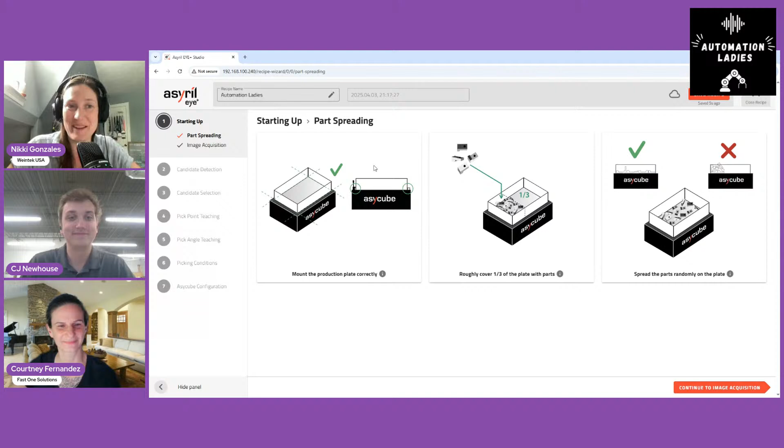Okay. And I will note, for vision folks watching, this ought to all look pretty familiar. But if you're a control freak like I am, and you're starting to wonder where do I set my gain and all these other things that you want to be a control freak about, I pestered him when he did this demo, and he had to divert and show me where all the stuff is. But you can actually wrangle control as much as you want. As simple as they've made this, if you want to peel back layers and get into settings that he's not showing here, it's all there if you're the control freak like me. I just wanted to make that a side note.

Yeah, I'll go briefly over stuff, and I'll probably not go as in depth as some people might like, but we've got a lot of different options as well, and tools to be able to make it as advanced as you need, or as basic as you might want. So the world's your oyster here.

But even this first step is just image acquisition. So when we're setting up our recipe, we want to build up a database of images to use for vision training. And so by default, EYE+ will take 30 images with the backlight. And if you've got a front light, it'll take 30 images with the front light as well. Those are the pictures that you get to use to train your vision model on.

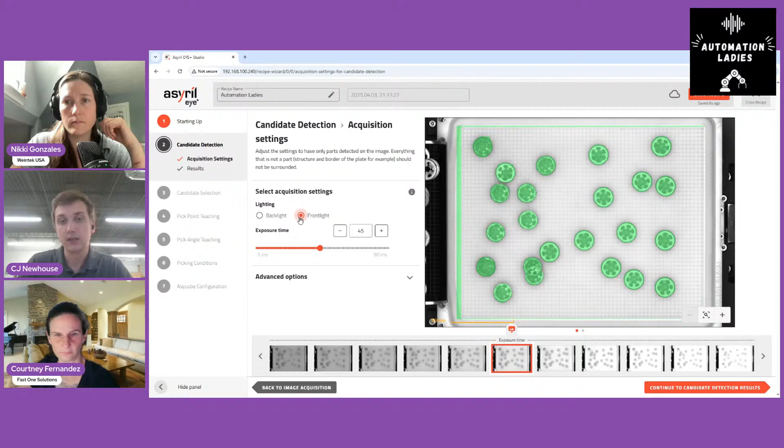So during production, it's not going to take 60 images. It's only going to take whatever images you actually use in the recipe. But we're given 60 to work with to use at different steps. So right here, you can see how my exposure time varies from 1 millisecond all the way up to 90 at a 3 millisecond interval. And so at any next step, I can use these different lighting settings. I've got backlight and front light as well. So a lot of tools for you to be able to use.

But what this first step really is, step 2, which is really step 1, is to just determine what is a part and what is background. And so EYE+ has this really cool algorithm that we use to determine what is a part and what is plate automatically. It goes through all of the pixels and uses that algorithm to determine, okay, these pixels are really white and these ones are a lot darker, and so this must be a part. The goal of this step is to get all of the parts marked in green without getting any of the background noise included.

And you can see what EYE+ is seeing here as far as what is considered a part and what is considered a plate. Anything that is white is a part, and anything that is black in this image is background. And so I can adjust this however I see fit. Maybe I want to lower the exposure time a little bit to try and prevent any washing of the parts from this image. I might also want to apply a noise filter.

So if I've got dust or debris on my Asycube, I can say, okay, anything that is 15 square millimeters or smaller is just background noise. It's just debris. It doesn't actually matter. I don't want it to be accounted for picking or potential collisions. And so once I've got all of the parts picked in green, I've separated the platform. So this half right here is all good parts, and then this half is all bad parts. I've even got some parts overlapping here.

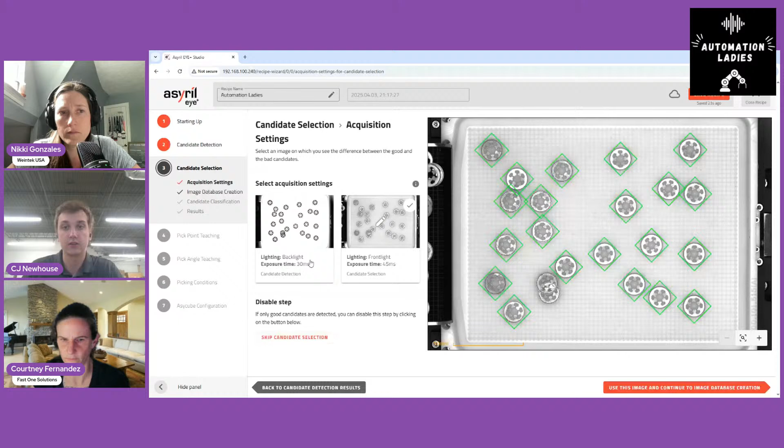What this step does is build an AI model to determine part orientation. We're going to use our candidate detection step to build a database of candidates, and then we're going to go through and classify those, whether they're good or bad candidates. So if we go to our image database creation, what I like to do, and it makes my life a lot easier, is I will section an entire plate full of good parts.

And this helps prevent me from making any human errors. I'm pretty prone to those. So aren't we all? I try to avoid setting myself up for failure if I can.

So yeah, we'll take some images here. You can see 27 out of 50 candidates detected. Like I said, using this candidate detection step, we're able to find these candidates on the plate and store them in a database. We need 50 total candidates to be able to start classifying these. Those first 27 are all in the good orientation. Then I'll flip them all over to the bad orientation. And I would include any other bad orientation that might get past that size filter as well, just to add those to the model to train them as bad.

So once I've got those two images done and my 50 candidates, I can begin classification here. I prefer to use this overview mode, which shows you the entire picture. I can just select good candidates and then start clicking them, and it tosses them into the good bin. So I'll classify these ones. Then I'll come over here to the next bad image and classify these as bad. Once I've got 15 good and 15 bad, EYE+ says I've got enough candidates classified to build a model, but I can always continue classification to train more parts. So if I want my model to be a little bit more robust, I can always add more parts.

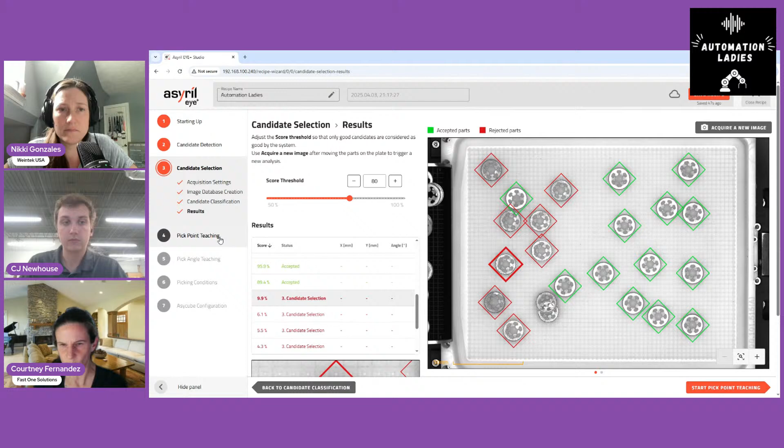So you can tighten this up if you'd like, or you can lower it. Or if you're not seeing enough distinction between these parts, you can always go back and add and classify more parts so that you can have a more robust model. Okay. This looks good to me, so I'm going to continue moving along.

I've got good part differentiation, and so the next step is just placing a pick point on the part, right? So we've determined that these are all good parts now. Now we want to define where our robot end of arm tool should go to pick these parts. So I'll jump back to a backlight image here. I find it provides a little bit better of part outline for the way that pick point positioning works.

And so EYE+ will kind of map what it thinks are contours or features or faces that it's then going to match onto all of the parts that pass through this candidate selection step. And so anything marked in blue, it's going to try and match onto another good part and then place a pick point there. So what I can do is I can kind of mask out some of these noise features here,

like this. And then I can take this little circle from my toolbox and actually start to line up this circle here so that when my pick point gets placed, it gets placed right in the middle of this circle. And you can see that it's locking onto the middle of this circle here. And I can lock on to this horizontal or vertical axis as well. Just some tools to be able to line up. But this target is where my robot will go.

And does this work with any robot? It does work with any robot. Yep. Okay. So EYE+ natively communicates over socket messaging, so TCP/IP. So most major robot brands have the ability to communicate over socket messaging. Otherwise, if you prefer to use a PLC, we also have field bus modules that integrate with EtherNet/IP, EtherCAT, or Profinet. Okay. So those are the 3 field bus modules that we offer and support. So a lot of different options for you to be able to use.

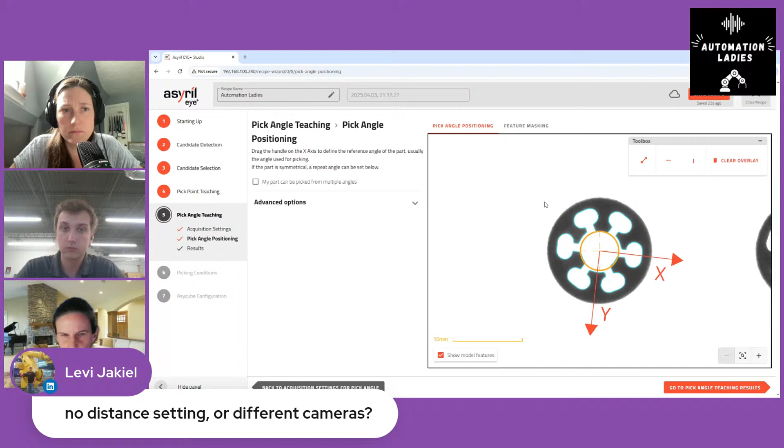And so hang on, we have a question here from the audience. If you don't mind, I'll pop in. Levi is asking, no distance setting or different cameras? So Asyril's standard only sells a 6.3 megapixel camera. We have 2 different working distances for each Asycube size. So there's a long and a short that varies by size. And so there's a couple different working distance options.

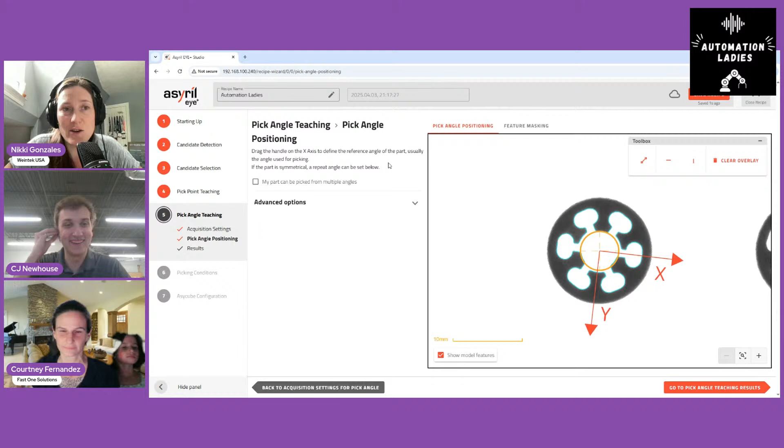We were just talking about this earlier. CJ was like, so do I have to talk for 45 minutes and then Q&A at the end? And I was like, no. Let's try to do the Q&A as they come up. It's a lot more fun that way. Yeah, much prefer that way.

But what you can see here is what I'm able to do is actually provide a couple of different repeat angles. And so, we've got some symmetry within the part here. And so I don't necessarily care which of these my part is rotating on. I just want to make sure that my x-axis is lined up with this feature. And so I can provide it with 6 different repeat angles. I could provide it with up to 20. Okay. So it gives EYE+ a little bit more flexibility on how it wants to orient the end of arm tool.

And what's really nice is in this next step, when we're accounting for our end of arm tool, it actually will check all of those different angles to make sure that there's no collision, right? So if I have a part that's overlapping like right here, it'll actually check the other angles to see if it can pick at a different rotation. So what you do here is you take either your circles or squares and map out the space that you need your end of arm tool to have to come in and pick these parts.

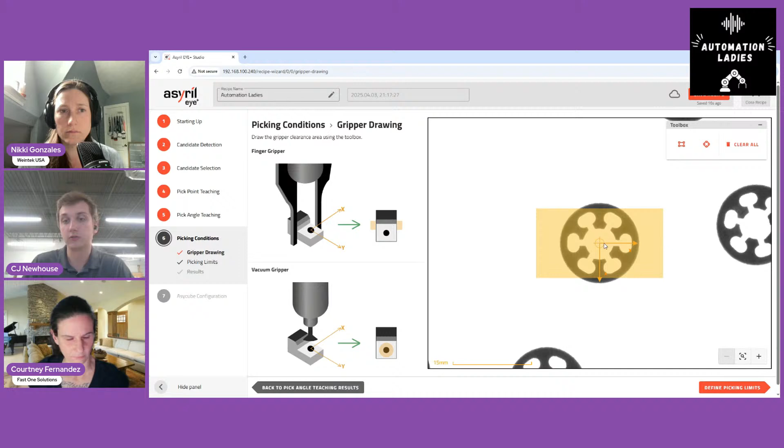So if I had like a 2-finger gripper that was maybe 13 millimeters thick, and when it was open wide to pick, it was maybe 24 millimeters wide, I would center that along this part here. And now anything within this yellow exclusion zone would invalidate this part for picking. So if this part over to the right was closer, this part would no longer be pickable because there's an end of arm tool collision there. Yeah. And so EYE+ is able to manage that as well.

The picking limits here is just to make sure that your end of arm tool has enough space away from the wall. So making sure that your end of arm tool doesn't collide with the wall. And then once you've got that, you're actually done with vision. And so any part marked in green is considered a pickable part. And this part coordinate would be provided back to your robot or your PLC. Anything in red is considered a bad part. And so you can see that it failed candidate selection here.

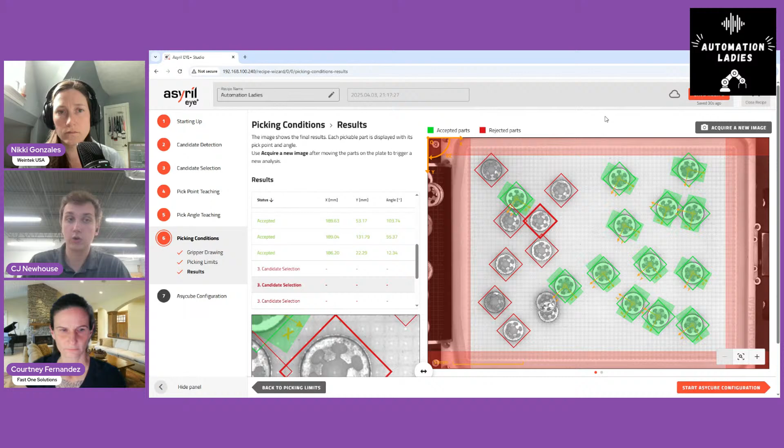And so once you've got your vision done, the last step is to tune the Asycube. And so I'm actually going to switch cameras. So you guys are no longer going to be able to see me. And you're actually going to see the Asycube, which is a lot cooler than my face.

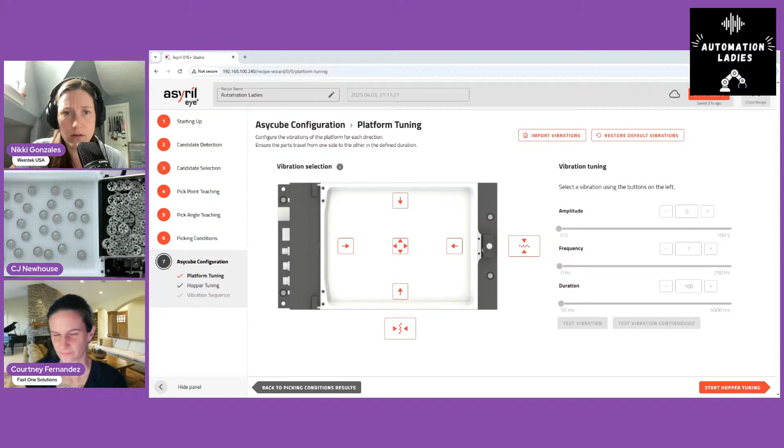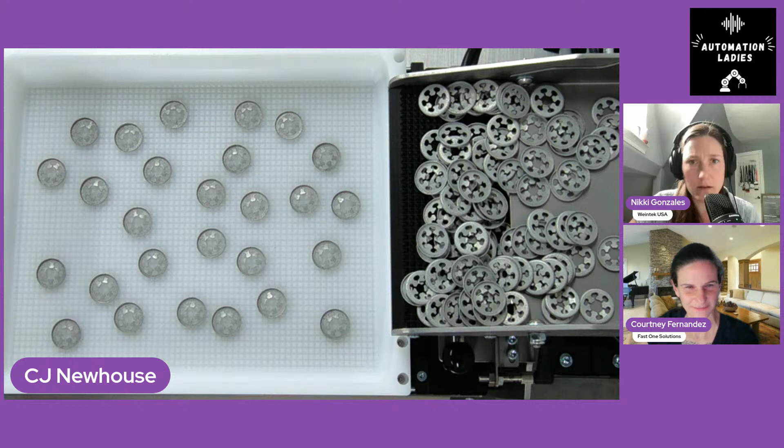Should I move that to the main screen? Or do you still want the software on the main screen, the bigger one? You can move it to the main screen. That might actually be better. Let me see if I can change the layout here. Maybe I can't. Let me see here. If not, that's okay too. There we go. Somehow, though, I lost the software part. Do we need to look at that one at the same time? Maybe, yeah. Ideally. Okay, let me see if I can. That might be okay, I guess, if they can just see the parts on the Asycube. Yeah, we can still see it even though it's kind of small.

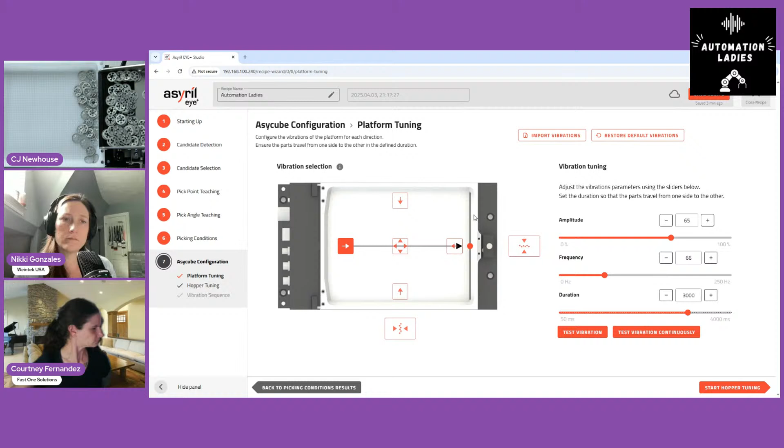And so you've got control of the amplitude and frequency of these directions. So you've got forwards, backwards, left, right, or right, left, and a flip move here. And so what we're doing is we're telling EYE+, okay, when all my parts are lined up along this line here, it takes X amount of seconds to go all the way over to the other end. And so my goal is to maximize the performance of the system while decreasing this duration.

So I'm cheating here. I kind of already went through and tuned the Asycube before this, so I know the settings that work. But what you would do is you'd go through and do a couple of different vibration tests to find the frequency and amplitude that move the parts the fastest. And what I found for these parts was 100% amplitude at 66 hertz got the parts over in 1500 milliseconds. And so if I test that vibration, might get a little loud, sorry. So you can see that the parts move over to the other end.

And then if I take those same settings and apply them to the opposite direction, we can see that the parts move over to the other end. And so my goal here is to get those parts to move from one end to the next in the fastest amount of time. So for this one, it ended up needing a little bit extra time. So 1750, you can see those parts move over there. And then if I do it in the other direction, copy those same settings.

And then, so once I've got all the directions tuned up, you can spend 15 minutes doing this, or you can spend 15 hours. I would err on the side of not 15 hours. Try and maybe spend 30 minutes doing it, get it 80% of the way there, because EYE+ will always automatically correct itself. So if it doesn't make it there in the first go around, it'll get there the second one. You'll still have some pickable parts, and it'll automatically always be recentering itself. So it's super, super handy.

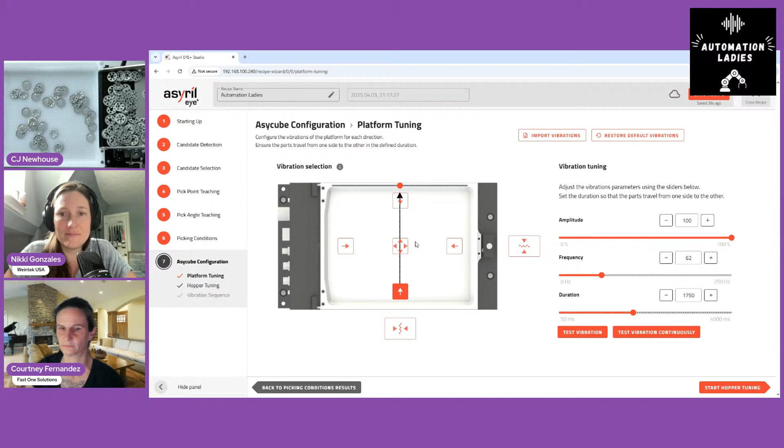The last step we've got to do is tune the flip move. And so we want these parts to separate well while flipping over to different orientations. And so again, I cheated here, but if I just click test vibration, you can see that the parts start to separate out and orient, right? So there's going to be some good parts here. There's some bad parts. There's parts overlapping. That's okay. We just want to be able to present a few parts to the robot to be able to pick.

So once we've got the Asycube tuned, which is what we just did, now we have to tell EYE+ how many parts need to be on this Asycube. So if I tell it, maybe, I don't know, 30 parts. I try to get this fill percentage to 20%. That's what I've found is a good general rule of thumb for part quantity, but this step 7 Asycube configuration, your platform tuning and your hopper tuning, it's more of an art form than a science. So you'll probably have to do some trial and error to figure that out.

But what I'll do is I'll take all of these parts off of the Asycube, and we're teaching it how long it takes to go from empty to full. And so that way EYE+ knows, okay, if I need to feed on however many parts, I know to adjust the vibration duration to feed that many parts in. So I do 50% amplitude at 500 milliseconds. I hit vibrate. Oh, wrong one. You can see that it feeds on some parts. That looks to be roughly about 30. You could go out and count them if you want.

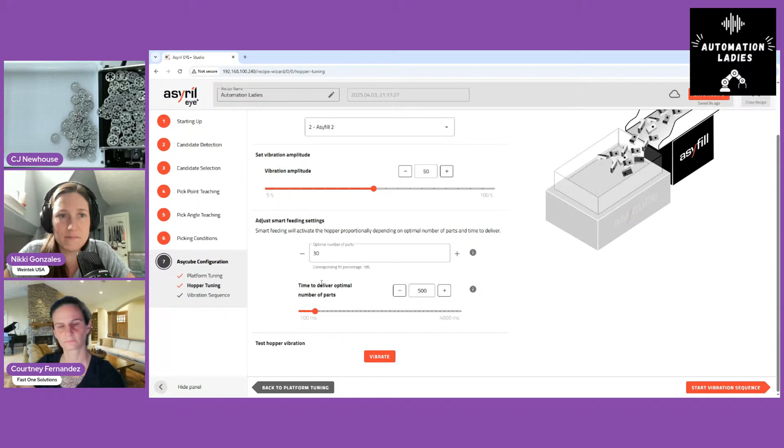But the last step is to build your vibration sequence. So you've got your platform tuning and your hopper tuning done. So now EYE+ knows how the parts work. Now you're telling EYE+ what to do when you need more parts. So when EYE+ takes a picture, it stores all of those part coordinates in a queue. And once you pick all of those good parts, you need the Asycube to vibrate again. And so that's what you want this sequence to run through.

And so we typically see the smart feeding. So feed on however many parts I took off the Asycube, which is right here. You've got your smart centering. So center the parts, make sure that they're not towards any of the walls. Flip the parts to separate them. And then I'll give it about a 900 millisecond stabilization time to let the parts settle before taking an image.

Okay. And so, if I just hit run sequence here, see EYE+ flips. This time there wasn't any, but if I hit run sequence again, one good part here, right? So over the course of time, as you pick more parts and separate these, you'll just pick this part, ask for another part coordinate, and EYE+ will do the rest. So now you've got 6, so you go pick, rinse and repeat. The system will go all day long, all night long.

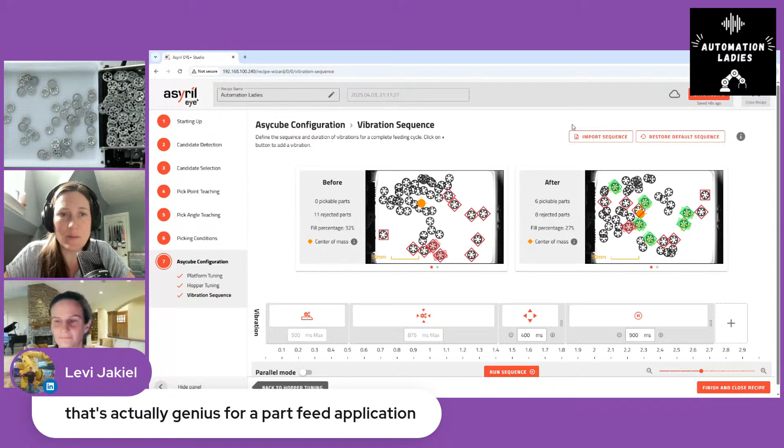We got a comment here from Levi. That's actually genius for a part feed application. Yeah, that's why we wanted to show you guys this. I feel like there are so many things in our industry that, once you've seen them, you kind of forgot that you didn't know that they existed, but there's still tons of people that don't know that this exists. And so I'm super glad that you got a chance to see that. And thanks, Levi.

Yeah, it's super cool technology. There's nothing really like it in the US. We have a patent on the 3-axis vibration technology. So we're the only flexible feeder company that can manipulate parts like you're seeing here. And so we're really unique in that sense. And paired with EYE+, you're really able to make full use of all of that. So without I+, how does the Asycube work? You just have to integrate it with third-party stuff to get it to work?

Yep. So you can still use the Asycube with any other vision system. It's independent of that. You just have to tell it how to vibrate. So I would say vibrate forward for X duration, flip for X duration, or execute this pre-recorded sequence. You can still make use of these smart features without EYE+. The only downside is you have to be able to feed that information back, right?

So you have to come up with the part counting with your camera and feed that back. You have to come up with the center of mass or gravity or pixel calculation on your own and provide the X and Y coordinates for that back. And then the Asycube will do the necessary moves.

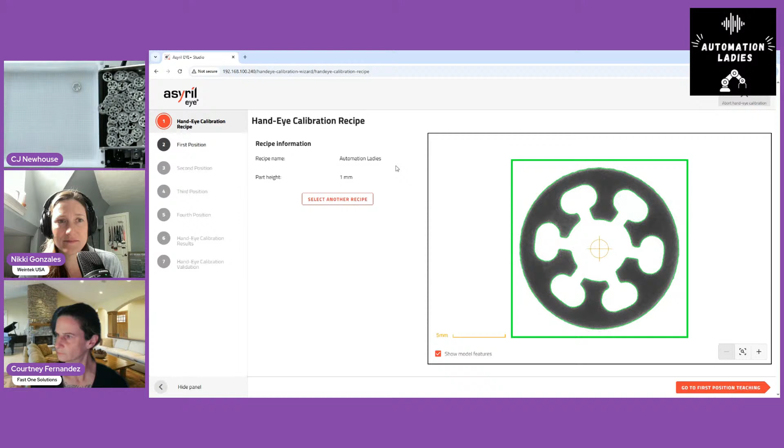We'll go to the first position. Again, it guides you. Pick your part with your gripper. Move your robot to one corner of the Asycube. Then you enter your robot's coordinates. Because I don't have a robot here, this is going to be designated as 0, 0. So if I type in 0, 0, that's my robot coordinate. I then release the part and move the robot out of the camera's field of view, and take a picture. Now it's mapped this position in vision coordinates to your robot's coordinates, so it knows this is 0, 0.

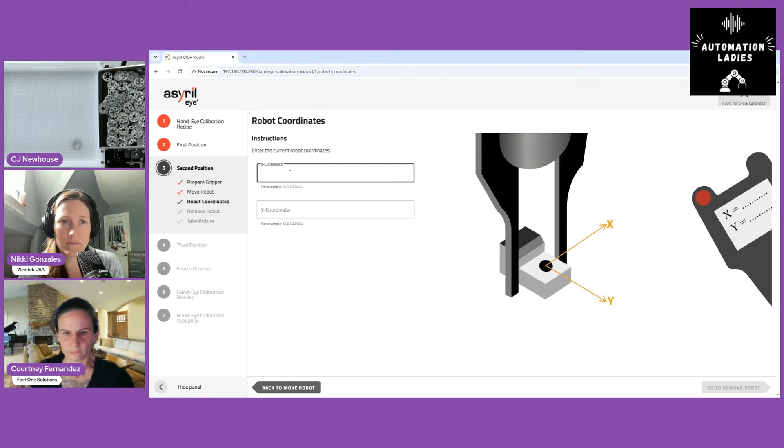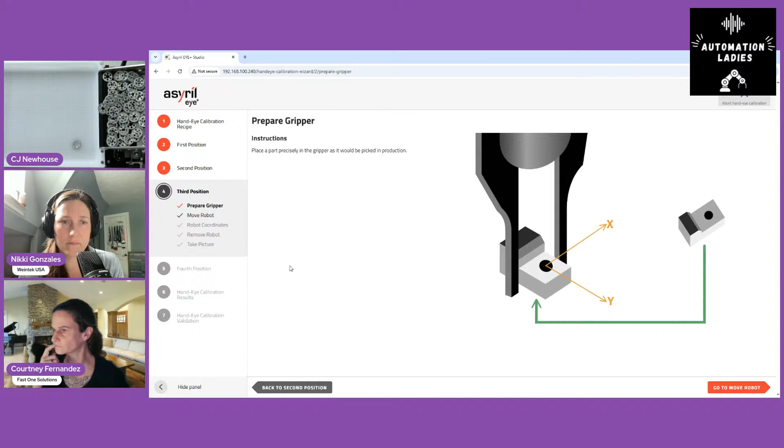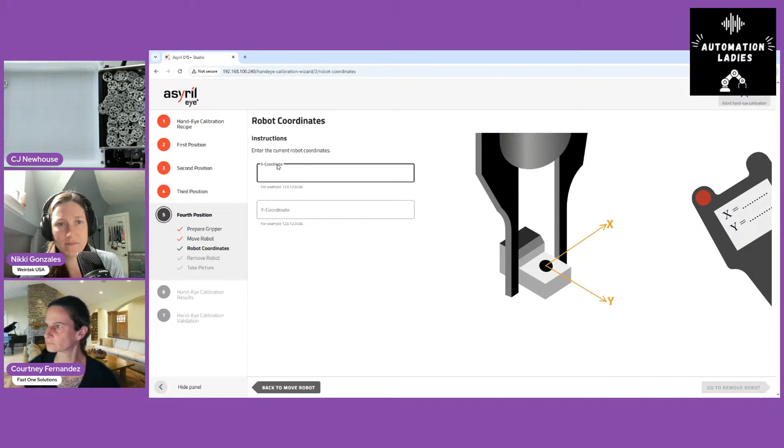Now I'll pick this part up and move it over to the other corner. You do that with your robot. This one we'll call 0, 1. Release the part, take a picture, go to the third position. Again, all of this would be done with your robot, not your hand. This one would be 1, 1. Take a picture. And the fourth position would be 1, 0. And now you've got your hand-eye calibration results.

I've got a calibration accuracy of 0.825 millimeters, and that's because I did it with my hands. I'm kind of impressed with this, actually. I normally get in the range of 2 to 3 millimeters, so I'm getting better at this. But I would suggest getting this down to about 0.2 millimeters or lower as your goal.

You can validate that calibration too. You can move your part anywhere on the Asycube and hit acquire a new image up at the top right. This will provide your robot coordinates and your RZ rotation to jog to, pick and validate that your calibration has been done correctly. If you're happy with it, you can validate and save. If you're unhappy with it, you can restart and do it again if you're seeing some deviation. For this, we'll just validate and save, and we're good to start integrating and picking and placing.

I would then be able to start writing my robot code, and I'll show you a little bit of what that looks like. Every recipe is generated with a unique recipe identification number. This one is tied to the Automation Ladies recipe that we just created.